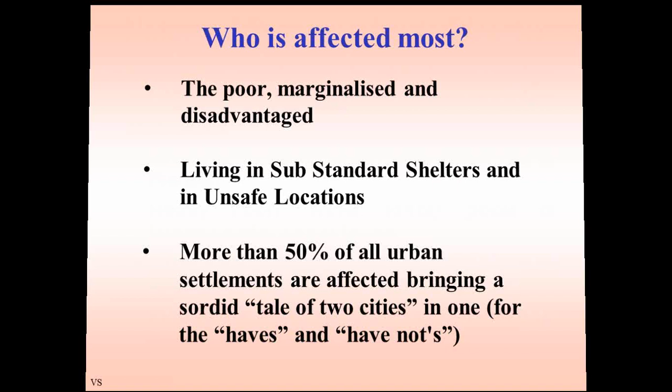And you saw the way the Nepal earthquake also brought so much misery to thousands of families. They're all buried and the buildings are all collapsed. But what actually happens is an important issue. Now, what type of damages happen in buildings is an area I would like to get into and give some information on.

What happens is, if you have a multi-storied apartment where normally the ground floor is kept for car parking - and that's normally done by a large number of builders, whether you see it in Gurgaon or Gujarat or Maharashtra, where parking is an important thing - that's called the soft story or lower story, and the whole thing gets buckled. That's called the soft story collapse at the ground floor.

That's primarily because you have not done the earthquake resistance through appropriate strengthening required for ductile detailing. I'll come to that a little later. The whole building collapses like a pack of cards, like you saw happen in Gujarat.

In an earthquake, the most important thing is the slimmer the better, so you don't want too much weight in the building. If you have very heavy floors, water tanks on top, and pools at the upper level, these are things which can create problems, as you saw in the Gujarat earthquake and also the Nepal earthquake. You also must not neglect the design of the basement floors, or you will have a problem there.

The next area is the issue of the building plan itself. You make a lot of projections and other features, and that also is not done in a proper design form.

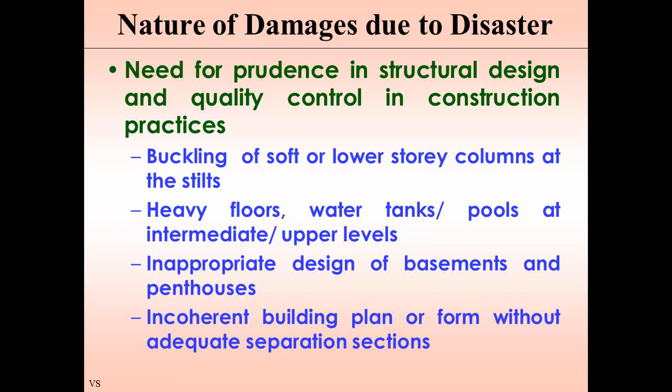These projections and depressions, horizontally and vertically, can also create problems of the building separating -- suddenly the staircase being knocked out and separating, or a room being knocked out separately and standing alone, etc.

Equally important, especially for multi-storied buildings, is the issue of shear walls and bracing.

This particular aspect is very important, especially for larger tall buildings -- 5 stories, 10 stories, 20 stories, and more, even 30 stories, which is now the order of the day in most big cities.

So, absence of shear walls and bracing means the building should not be in a rigid form but a flexible one, and therefore you should ensure that the right shear walls and bracing are provided.

The engineers should have designed things in such a way that the staircase should not fail due to inadequate flexibility and what I call the wrap-on effect.

That's what the engineers will tell you -- in many cases this has happened, causing damage. Equally important is collateral damage due to the collapse of one building onto an adjacent structure. Your structure might be good, but another building collapsing onto it is also a problem.

The next is very important, especially for buildings closer to a river or on soft soil -- it's like liquefaction of soil. It will be like a mixie.

If you put a mixie to a milkshake or a mango shake, that's exactly what happens in an earthquake -- the whole building with the water and soil below, the whole soil becomes liquefied, and the whole thing collapses immediately because you have not done the right foundation design.

For example, in Delhi, the whole Yamuna flood plain area, or any river area in any city where water bodies are present and the soil is very soft, this liquefaction of soil is a very important component.

Whereas if you do the same thing on a hard rocky area, the liquefaction problem will not be there. So, soil investigation and related studies for any particular site become equally important.

The next major component is not fixing your roof members, made of steel or timber, and the roof covering -- the whole thing can fall out, collapse, and fall down. That's exactly what happened in Nepal, which has this particular problem.

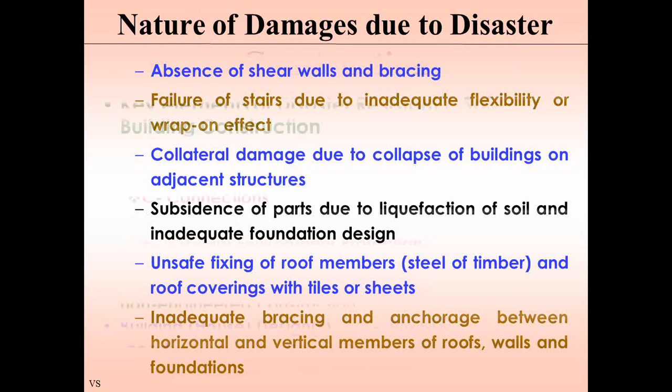I call all these fundamentals the design features A, B, C, D, E: A is anchorage, B is bracing, C is connection, D is detailing, and E is external environment protection.

If you do this for every one of your buildings, having a checklist for it, you can be 100% sure your building is not going to collapse and you're not going to end up under the debris.

I intentionally brought out how buildings collapse, so you understand how, in the design and construction of your building, to take care of these issues -- and there are a large number of options depending upon the material.

You can make it out of a mud wall, a stone wall, a brick wall, or a concrete column and beam. So depending upon the nature of construction in a village, a small town, a medium town, or a big city, you can't expect everything to be made only of concrete alone.

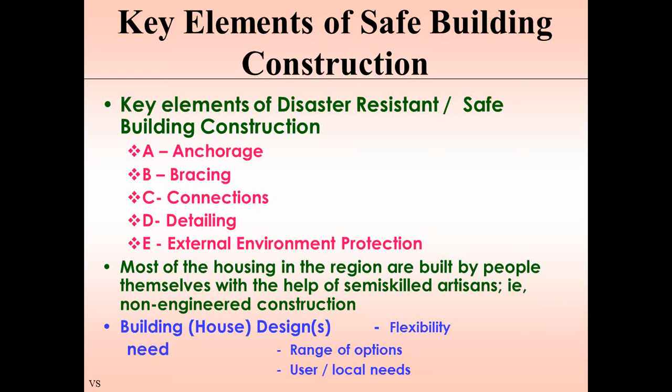So we have to take care of the right level of features to deal with that particular thing. That's very important because India is a very large country of continental proportions. We are very particular that this has got to deal with existing buildings, since we already have a large amount of housing stock available, like the houses in which all of us are living.

For existing buildings, I should check whether my building is safe. Many people can tell by looking at your building whether it has incorporated provisions to withstand an earthquake. If not, you can strengthen it for disaster resistance - we call it retrofitting. We do strengthening features so that when an earthquake comes, the building will not collapse. So retrofitting, repairs, renewals, and maintenance are required for existing buildings.

Today, when there's no earthquake anywhere in the country, there should be a major effort in surveying all these buildings. Gujarat did that for a large number of their cities and towns. Now similar surveys should be done in all major cities to see if they are in seismic zone 5 or 4.

As you know, India is divided into 4 seismic zones - I use the word 5 because the topmost is zone 5, which has the highest earthquake effect, similar to what you saw in Nepal or the Bhuj earthquake. Seismic zone 4 is where Delhi is. Seismic zone 5 covers the complete Himalayan region, northeastern states, Sikkim, Himachal Pradesh, Jammu Kashmir, the Gujarat region, and Andaman Nicobar.

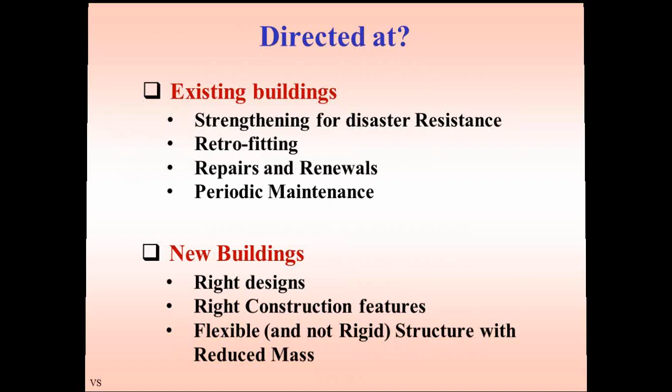The right construction features should be there - the building should be flexible, meaning it should be able to respond and not be a rigid masonry structure that collapses entirely. The whole point is to reduce the mass - don't put too much weight on it. Japan has shown the world how, by reducing building mass, they have achieved earthquake-resistant construction in a very large way.

A most important thing to know is that your city or town will have a building enforcement group - a municipal corporation if it's a big city with a mayor and municipal commissioner, for cities with 5 lakh population. But that's only about 160 odd cities. The remaining are small municipalities of 2 lakhs, 3 lakhs, 1 lakh, 50,000 population, etc., like Hapur, Meerut, and other small towns outside Delhi, in any state.

The local building bylaws, building codes, and planning standards are the documents under which you must submit a building plan for approval. No construction can take place formally unless you get a building permit, which is given by the local bodies.

Unfortunately, until very recently, most of these regulatory documents did not have even one line about disaster - the word 'earthquake' wasn't even there. So there was no question of dealing with earthquakes, and nobody would have submitted a building plan to address them.

This is the reason why a large number of buildings collapsed - because local bodies did not insist on this, since their building bylaws had no provision to deal with this aspect. This created a major problem. Hopefully now these documents are getting updated, and risk perceptions are now being incorporated.

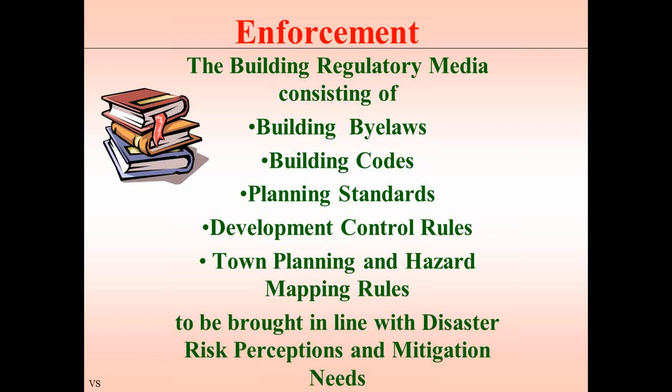If your local building bylaws reflect your vulnerability, you should know your seismic zone number or whether you're in a cyclone area. You should first know whether the city has appropriate awareness, whether all citizens know, and how we can create this awareness.

There are various ways to create awareness, like with malaria or other related problems. Citizens through committees or local bodies, through newspapers, radio, and television can be informed that we are in seismic zone number 4, and this information should reach everybody in the city.

Once you know your seismic zone, the next question is whether you're aware that your particular building has been designed to handle this damage, or whether you're in an unsafe building. This is everybody's worry - am I in a building which is unsafe?

That worry can only be addressed through a techno-legal regime, where provisions are included in the building bylaws in line with the National Building Code or the earthquake codes from the Indian Standards Institution. There are many codes for design and construction of buildings, which I won't read out now but can be opened later.

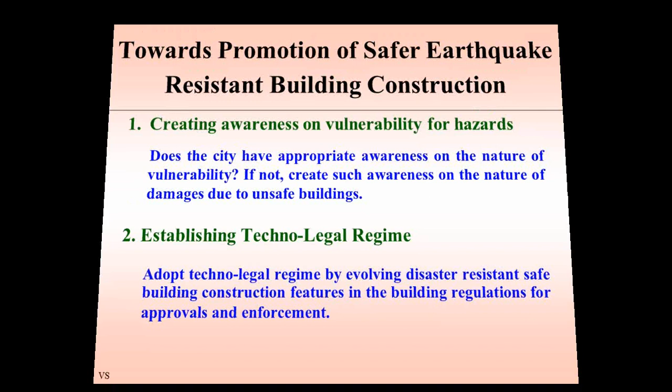More importantly, you must associate the right professionals. If you have a problem in court, you go to a lawyer. A health problem, you go to a doctor. An income tax problem, you go to a chartered accountant. Similarly, to build your own building, go to the right professional - a good architect and a good engineer.

For earthquakes, architects can't do much, but engineers can do a lot. So two terms are used - engineer and structural engineer. For buildings up to around 500 square meters and up to 5 stories, a normal graduate engineer can do the work. Beyond that, higher specialization is required - a structural engineer with a master's in structural engineering.

A normal engineer with a BE can't deal with that - it's all provided in the code. That's why using the right professional matters. You have to see what kind of building it is - a 20-storied, 10-storied, 5-storied, or single-storied building. For a single-storied building, it's enough to have an engineer associated, but for a taller building, you require a structural engineer.

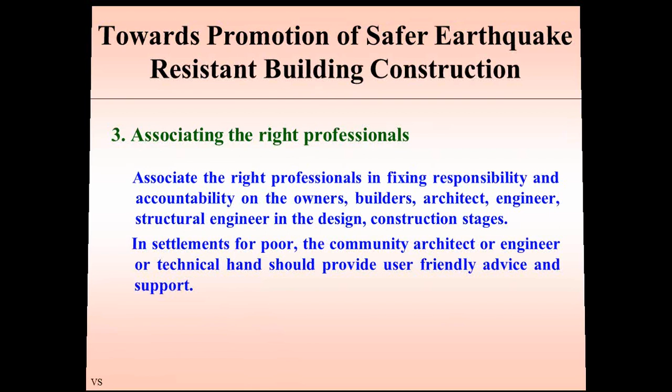For the poor, especially low-income groups who may not be able to access these professionals, we suggest that a community architect or engineer, or a technical hand from the local body, housing board, or slum clearance board, should provide user-friendly advice as technology support, since each individual can't approach an engineer or structural engineer directly. A big housing board or builder can arrange all that.

This is an important component, both at the individual and larger level. The next major issue is where you can put control mechanisms. One is getting approval from the local body, who will ensure your building plans are cleared in line with the provisions. Then during the construction phase, they'll go through the completion certificate and occupancy certificate.

But before that, you require a housing loan. Once you get a building plan approved, there's a techno-financing regime where many housing finance companies, when approving the building plan, are also ensuring that safety features are included.

I'm aware of many housing finance companies who burned their fingers giving money in Gujarat for houses that were not earthquake-safe configurations, so all those buildings collapsed and they got into problems. Whereas when I was CMD of HUDCO, the ones we funded were safe and could stand the test of time, so we didn't lose the money.

So the techno-financing regime is a tool used by housing finance companies and banks. When giving home loans to people, they will ask this question - whether this is going to be in Ahmedabad or in Rajkot.

So they'll ask a question: have you done what is needed for the approval based on the building plan approval? Unless you have the building plan approved with these features, they will not sanction a loan.

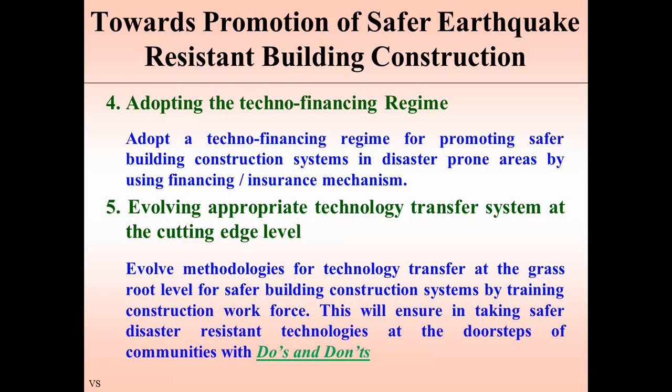Most important, aisa na kare is more important - the wrong way of doing construction between the foundation to the walls to the roof. All those details are very, very important. Why buildings collapse is primarily because a wrongly designed and wrongly constructed building is the reason why all this happens.

Now, these are all good, but what's happening is this can be done now only because you're learning after a disaster. For example, we had the Bhuj earthquake, the Killari earthquake, Uttarkashi earthquake, Jabalpur earthquake. Only after the earthquake, we all wake up. But we know that this is seismic zone number 5, 4, and 3.

We should do, therefore, a major shift in focus is needed. What can we do to make homes - that is the question today. How can we make our homes safer?

If I'm able to predict that, if I'm prepared for that, if I can prevent that, I can do the right planning on that, provide the right protection, promote the right publicity so people participate in that. So that is a series of efforts called pre-disaster. Before the earthquake comes itself, you do everything that is needed today to make it safe, so that when the earthquake comes, you don't have to worry at all.

But that has not happened in India so far, though all developed countries are already doing this. Now what we are doing is post-disaster. Earthquake happens, so many houses are damaged completely, so many people lost their life, so you're rescuing the dead body, recovering the live body, providing relief, rehabilitation, reconstruction of all the damaged houses, or doing some repair, renewal and retrofitting for the existing buildings.

So our whole thing is we have to shift from the R series, where we have put all our efforts so far - the post-disaster initiatives - towards the pre-disaster mitigation efforts, so that we can do something today, something in the next few months, something in the next 1 year before any earthquake strikes any part of India.

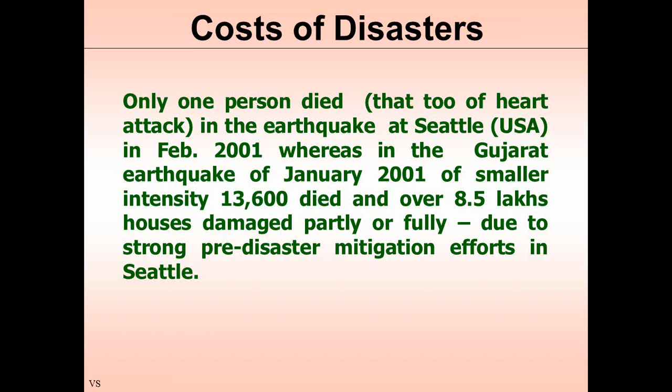Why? So what is the difference? We have to make all our cities like Seattle, because Seattle also knew they are in seismic zone number 5. So their building bylaws and codes provide for that. Neither the builders, nor the engineers, architects, or the municipal corporation dare build or permit anything other than earthquake safe. That's why when the earthquake happened, not a single building collapsed, and nobody lost their life because of the earthquake. So therefore, we have to use that situation like what Seattle has done there.

One more important thing: for a tall building, if you want to spend for pre-disaster strengthening and retrofitting, that's about 1 crore of rupees. Instead, if it's not done now and you want to do it later after the buildings have collapsed, you should spend about 10 crores. That means effectively 10 times the cost for post-disaster mitigation as against 1 crore you can spend today. Naturally, normally what happens in every building, around 3 to 5% will be the additional cost.

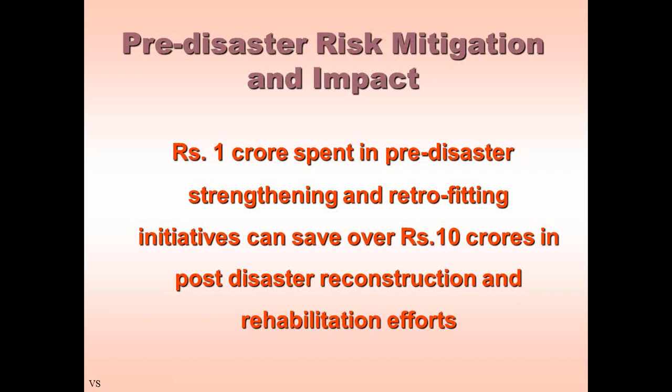Suppose somebody asks for earthquake resistance, how much will you spend on that? For a normal building of masonry or concrete, column and beam and slab, etc., around 3 to 5% will be the additional cost for the earthquake resistance features. But if you want to retrofit an existing building and strengthen it, the cost can go up to 8 to 10%. So you have a band between 3 to 5% for an entirely new building, for the safety of the building, and that's a must.

It's not an additional cost - you did not put it, therefore you feel it as an extra cost. For that earthquake situation, you have to put those particular features there. So that should be taken as a normal cost, and for the other option, you don't want to spend 10 times more later and start crying about it.

I think if you do all this effort of legal regime, the right professionals, awareness being created, etc., and also deal with the construction features, and the occupancy certificate is also given rightly, the people will have a confidence level that they got the building plan stage, they got the clearance from the local body for a safe building. It's constructed also safely, and that will be certified through the completion certificate by the engineer.

Based on which the occupancy certificate is given by the local body, then you have a sense of confidence, because you and your family - older parents, younger children - are all staying in the house on various floors. You've got to give a confidence level and safety level among all the occupants of the house. If you do that, we can work together for creating safer buildings, durable buildings which will stand 20, 30, 40 years, and more importantly, sustainable human settlement.

But that's a powerful message I want to put across, Jayashree and the team. I hope I've been able to put across some of the concerns in the limited time.

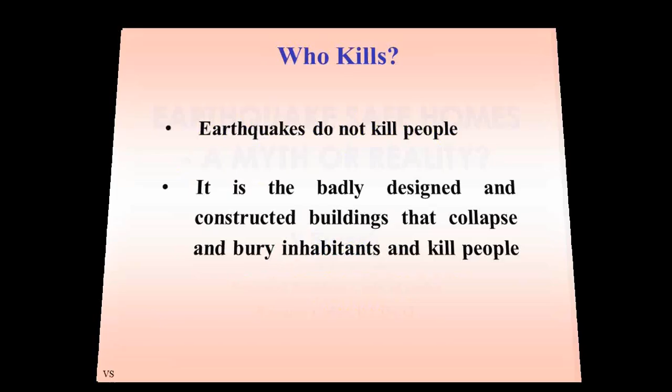I think your question covers 2-3 points, Rajat. First of all, you're talking of tier 2 and tier 3 cities, population of about 1 lakh or 50,000 or 20,000, not big cities. And if it's a small city, it won't have so many multi-storied buildings - it will be predominantly up to 5 stories or 2 stories. So whether it's a big city or a small city, whatever checks are required, as I told you a little earlier...

Liquefaction is a very major problem. So the nature of the soil below your building - if it is too soft with a high water table, liquefaction is a very major concern. So those particular checks that the engineer dealing with your project has to deal with, whether it's an individual house or a local builder dealing with that aspect - these are fundamental things for them to deal with. It's like the diagnosis done before the prescription is written by the doctor. They also go through all the tests, and based on the tests, use this medicine or that medicine. So the design is also based on that soil investigation, water table level, whether it's soft soil or hard soil - it's a must, whichever town you're in.

So if you're dealing individually with your own house to be built, then one engineer can help. Otherwise, the builder's engineer has to do all this investigation. But essentially what you're saying, Mr. Suresh, is that you should ask for the diagnostics report from the builders - just like you take a diagnostics report to a doctor, you should have the diagnostics report and then get the prescription based on that building, use this medicine, use this surgery, whatever treatment.

Very important. But Jayashree, you also raised with Rajat's question another point - a large number of single and double-storied buildings in villages and small towns. There we don't have to do a detailed design. There is a very interesting Indian standard called IS 4326 - I repeat, 4326 - which gives a large number of construction features that can make the building stronger. You don't have to go to an engineer to design that.